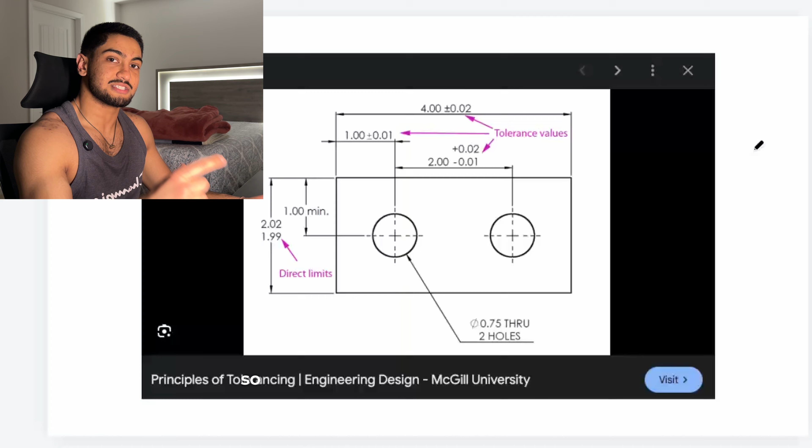First, I'm gonna give you a quick explanation on a topic in design engineering so that the advice later in the video is that much harder to forget. When creating a part, engineers have to look at something called the tolerance stack up.

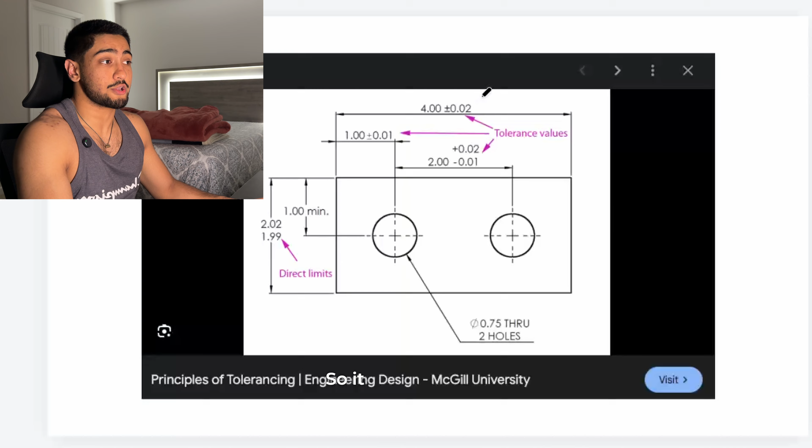If you don't know what a tolerance is, it's basically how much bigger or smaller a certain dimension on a part can be. For example, right here, the total length of the part can be 4 inches plus or minus 0.02 inches. So it could be 3.98 or it could be 4.02.

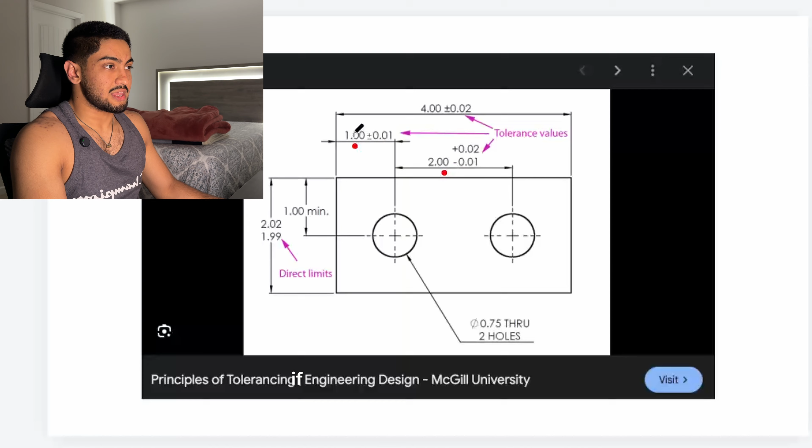Anything bigger than that, then the part technically fails because it's too big. A tolerance stack up is adding up dimensions to reveal any variations in the part that could cause the part to fail. So for example, what if these smaller dimensions in the part cause the part to become way too big? So right here, this 1 and this 2. If this 1 is at its biggest, so 1.01, and this 2 is at its biggest, so 2.02, that means this distance is something, I don't know, I'm not going to do the math right now. If it's at those measurements, is this distance being smaller gonna cause the part to fail?

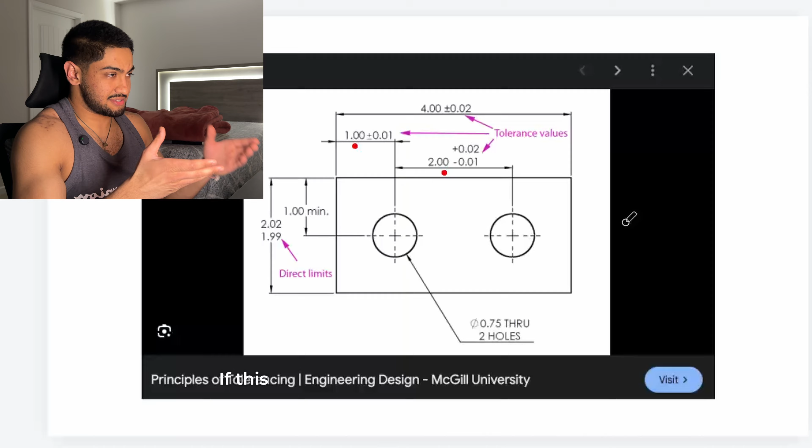This thing kind of looks like a gasket for a car. If this gasket goes into an engine for a car, but it doesn't fit because it's too big or too small, the assembly failed. The accumulation of small things caused an assembly to fail.

So what does a tolerance stack up look like in bodybuilding? Well, in the gym, you cannot let a buildup of tiny little inconsistencies cause you to get less gains in the end or even cause you to go towards an injury. A design engineer looks at their tolerance stack up to check if the worst case for the part still works. Bodybuilders do the same thing with their fitness.

So for example, missing meals or even having cheat meals. Are you missing meals every now and then? Are you eating unhealthily? Are you eating really good for 5 days in the week, the weekdays, but then the weekend comes and you're like, you know what, I ate really good, let me just splurge. Let me just eat whatever I want. Let me go eat that pizza. Let me go eat those cookies or whatever.

And to go back just a little bit, let's say if you're bulking, are you missing meals? When you're bulking, you need to put on more weight. You need to eat in a caloric surplus. If you're missing meals, that's going to be so much harder.

Whenever I was bulking, I was missing meals left and right. I was missing meals so often. Throughout the week, I would maybe miss like 5 or 6 meals because I just was like, you know what, I don't feel like eating, I don't feel like going out to go grab something, I don't feel like making anything. But the buildup of those little inconsistencies led me to get delayed progress. So you need to ask yourself, are you missing meals?

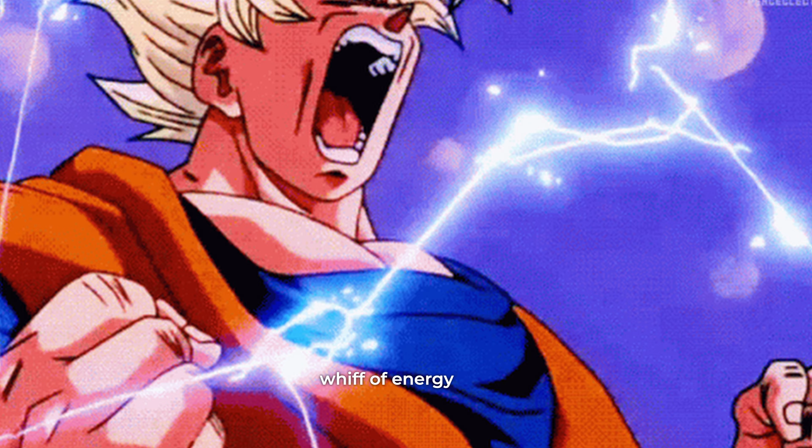Let's say it's nighttime and you plan to go to sleep at 10 p.m., sleeping from 10 to 6, so 8 hours in bed. But every night you keep going to sleep at 11 because you get that whiff of energy and want to be productive, which is good. But throughout the whole week, you just lost 7 hours of sleep. When you lose 7 hours of sleep, that's 7 hours less you're recovering. And if you don't recover well enough, you'll make less gains in the gym.

Another thing I even struggle with is rushing into heavy sets without a proper warm up. Today while doing squats, I did a few reps with just a barbell, then went straight to 135, then straight to 225. That was probably not smart of me. I probably should have done a bit more of a warm up.

On my second set of 245, I wanted to go for another rep. So I went down and then I just fell. I couldn't get it up, so I had to bail. That probably wouldn't have happened if I warmed up properly. If I had warmed up my muscles properly, they would have been ready for that set.

The last thing you need to check, probably the biggest thing, is skipping workouts, and also skipping certain muscle groups. If you're anything like me, you're probably skipping abs, or skipping rear delts, or skipping forearms. Trust me, you need to hit these muscle groups. If you don't hit them, they won't get that big. My forearms aren't that big because I skipped them a lot and didn't hit them consistently until around 6 months ago.

Now I also hit abs consistently, and I'm getting progress because I'm hitting the muscle group. I'm making it bigger because I'm hitting it. If you don't hit the muscle group, it doesn't get any bigger.